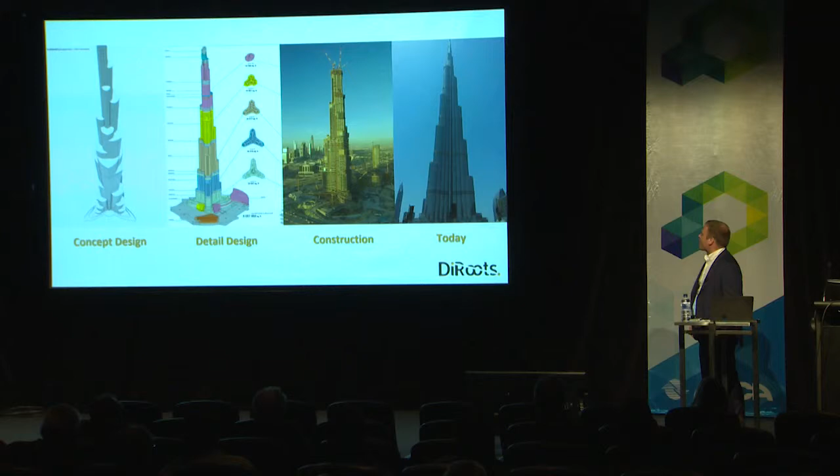And that starts with a story. Once upon a time, someone decided to inspire themselves in the desert flower to create one of the most impressive designs that we have today. You can see, I think you can recognize very well, this is Burj Khalifa in Dubai. And the reason I'm bringing this is because I want to make a comparison between what happened a few years back and what happened about 88 years ago.

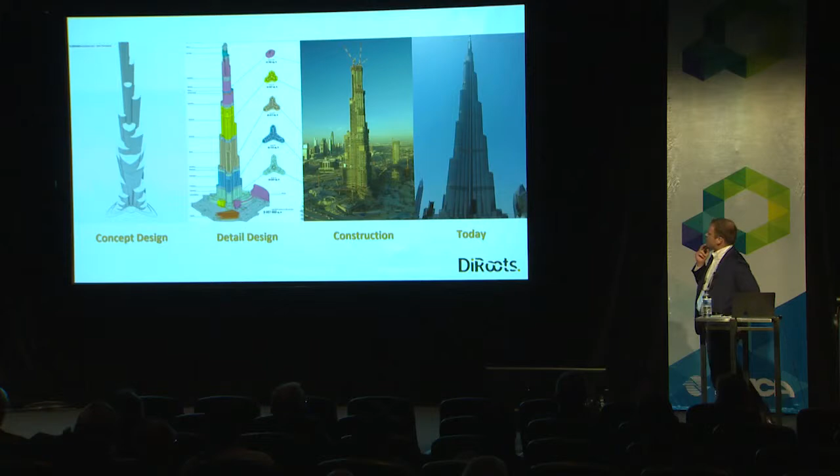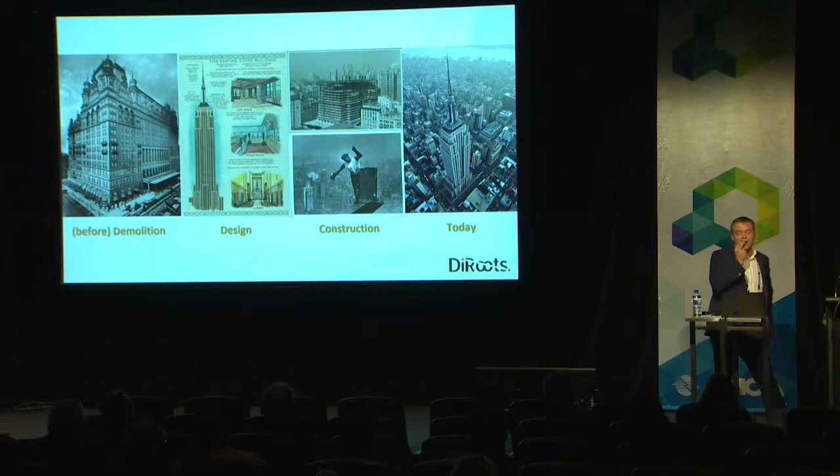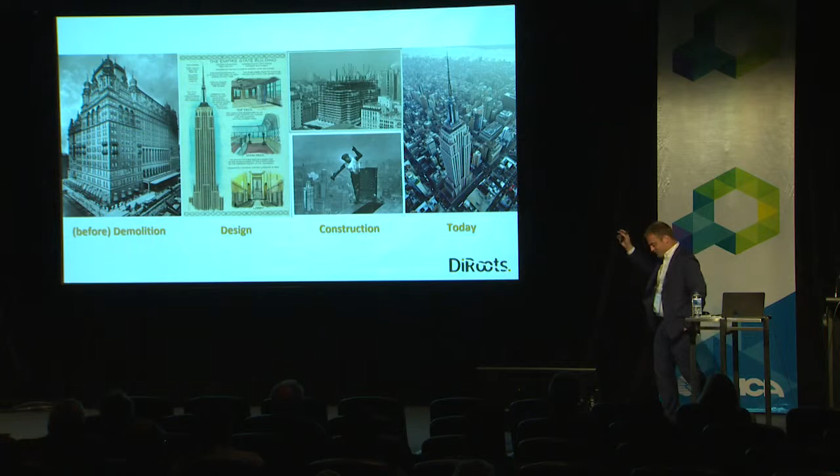88 years ago, someone decided also to make one of the greatest buildings of all time, in my opinion, the famous Empire State Building. I love this building. I love to see the pictures, we can see this guy standing in an incredible way. But the purpose is we want to understand what really happens.

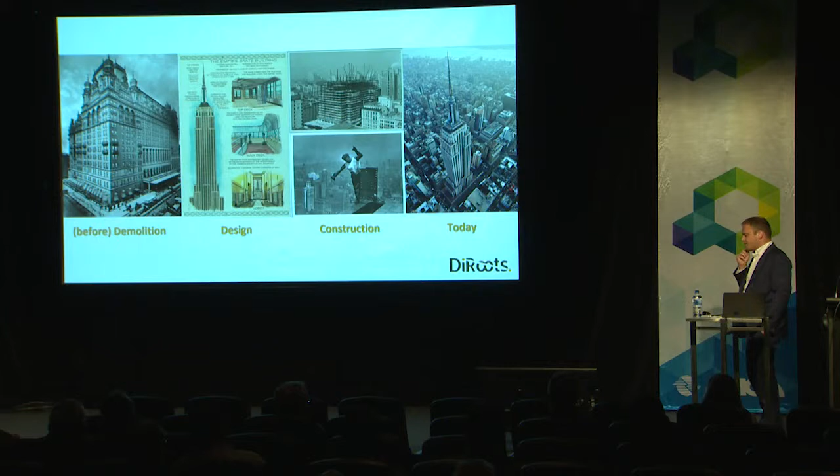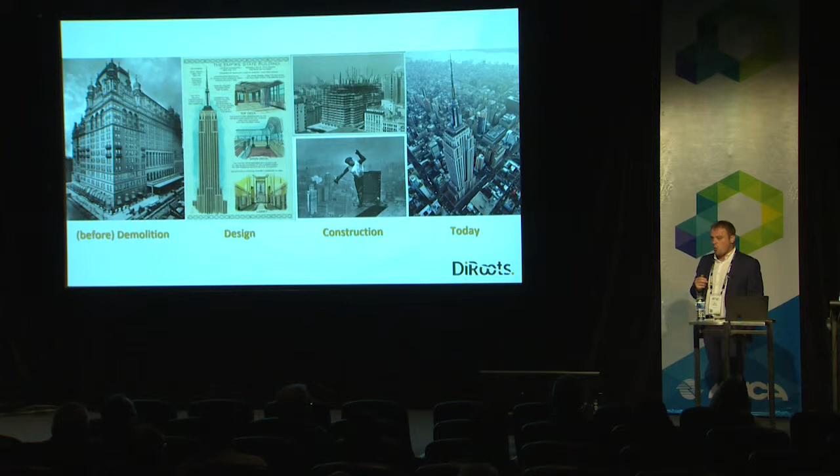There are quite a few facts which are very interesting regarding these projects, which both of them were built or constructed during two recessions. One of them was the Great Depression, which is a global financial crisis. And then we got Burj Khalifa as well, which was during the credit crunch.

Analyzing some project chronology, starting with Burj Khalifa, we can see the design started more or less in 2002. There were a lot of design alterations, I don't know if you know, even the names changed. But essentially, construction of this project started in 2004, and by January 2010 they completed it. So we got a program of 6 years just for construction. But that was 8 years ago.

Going now to the Empire State Building, and I love this. What happens is they start the design process in 1929, and they start the process of construction in 1930, with the excavations. Do you have an idea how long it took to build the Empire State Building? Any idea? To construct? I think you will be surprised. It only took 13 months. That is a fact, it's a fact.

And I learned that when I was doing my master's, because everyone used this case to demonstrate that there are real issues of productivity in construction.

Another curious fact about these two projects is one of them, Burj Khalifa, had a budget of $878 million, and they ended up spending approximately $1.5 billion. While in the Empire State Building, they had a budget of $50 million, and they ended up spending almost $41 million. And plus, they finished 45 days ahead of the project.

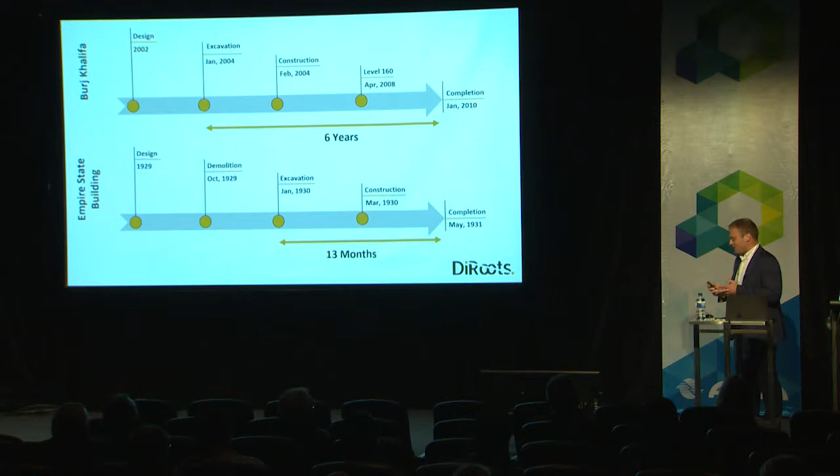So that is amazing. And so what happens is it seems we have a great problem in our construction. And we know, I think we all know about the construction issues we have. It's true as well, things are getting better, and technology is going to help, and that is the key. Innovation is the key. Technology is the key to really get the benefits we need and improve the speed and quality of our products as well.

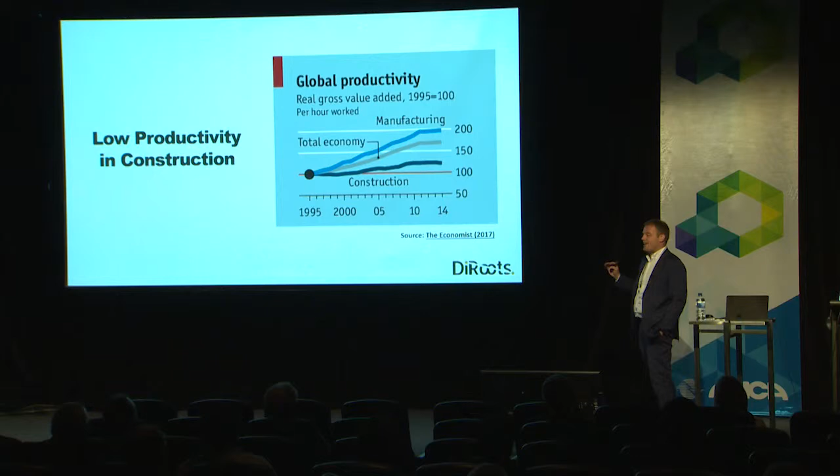As we know, we've got several issues with low productivity in construction. This is another chart comparing productivity in construction, and as you can see, it's coming down again in general as a global economy, while manufacturing is doing very well.

For example, some countries like Germany and Japan have stagnated and not really improved at all. But we also have some outperformance, and I was surprised doing my research to find out Australia is one of the countries doing quite well.

But we also have the biggest accelerator, which is China. I think we saw a video yesterday of what they're doing in China, how quickly they can build. I remember seeing a video of a 15-story hotel they built in 6 days. They claim, of course they work 24 hours a day, but that's the way they do it in China. They don't stop.

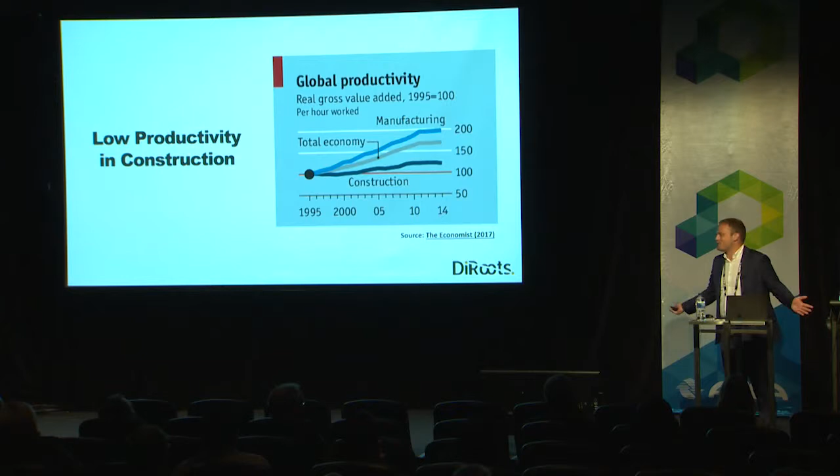Europe isn't doing even better - we're actually last in Europe in this case. So what really happened? We have all this technology, and we saw the example of the Empire State Building 80 years ago, which was an amazing job - they didn't have the technology we have, but they managed to do things.

So one of the things I want to do is go back in time and understand the first industrial revolution and the second industrial revolution and so on. As you know, and because you heard yesterday, sorry for repeating this, the first industrial revolution was powered by the steam engine. That was the main driver, the main enabler for the first industrial revolution.

So we talked about all these nice technologies that are coming up. But what does that mean for our industry, for the AEC industry? What we can see straight away is we're going to have supercomputers which will do everything, not like our old computers where we always get stuck, 'oh, it doesn't work like mine, today.' Also, what we're going to have as designers or engineers, whatever we are, we're going to have...

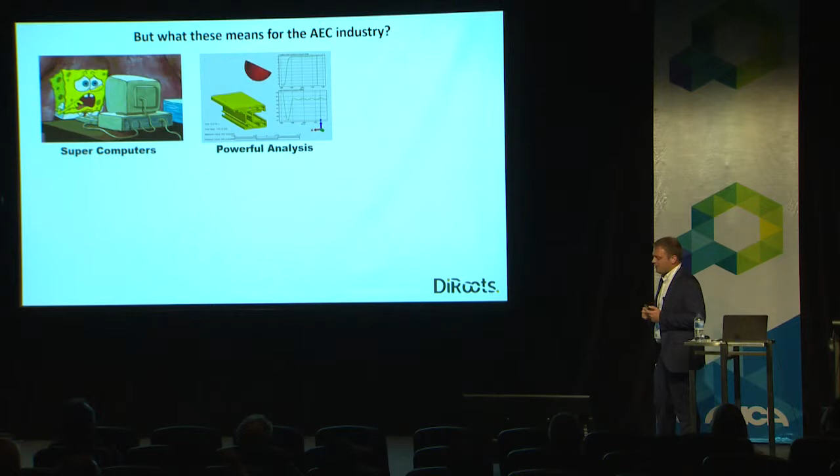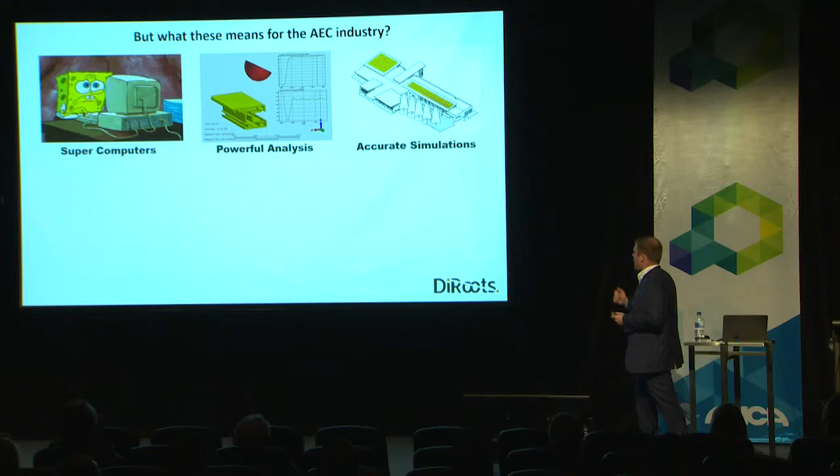Powerful tools to do quick analysis. We don't need to wait hours or even minutes. They will be done in seconds. Plus, we're going to have accurate simulations because of the way we're going to use the data, if we're using it the right way, of course. It will provide capability we haven't had before, and that is starting to happen.

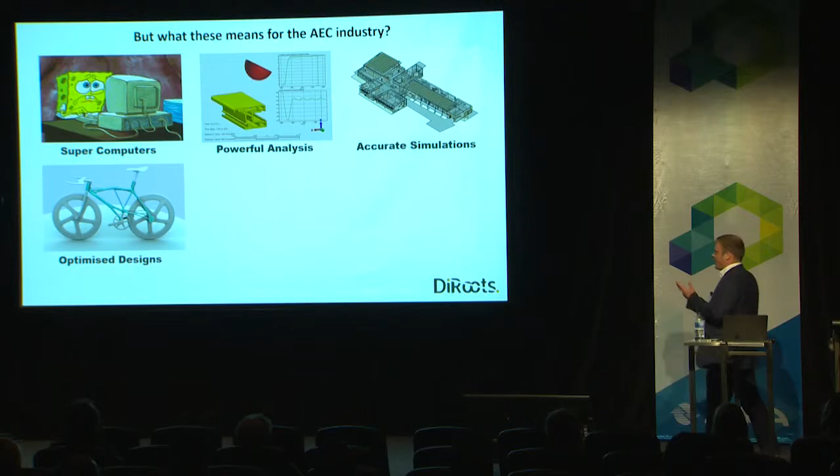More, we're going to have optimized designs. We're going to have the power to understand the variations of designs and their output, so we can analyze, we can simulate, and in the end, we're going to get faster and better designs.

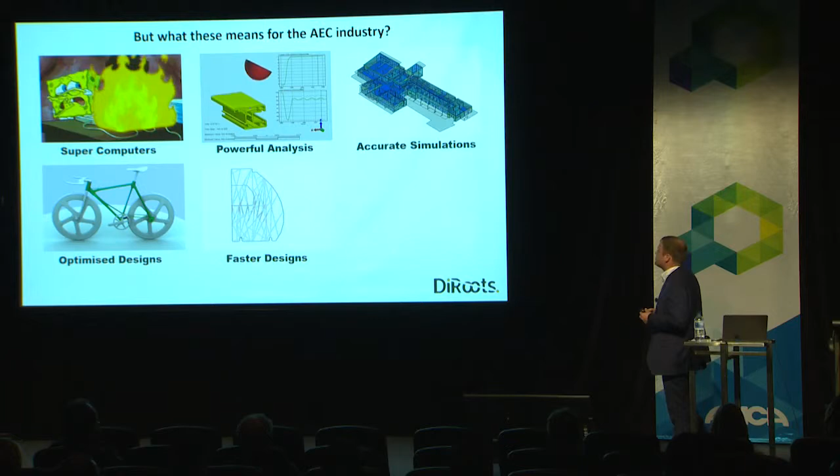We're going to have faster designs, guys. That's what is really happening to us. All this power is coming. The output is quicker, simpler, faster. Everything is going to be made quicker, in the quicker way.

And finally, what we're doing, and we saw some examples of this, and I have some examples regarding that, is the way we're going to be able to design. We're going to be able to design directly to fabrication. That's what is really happening already.

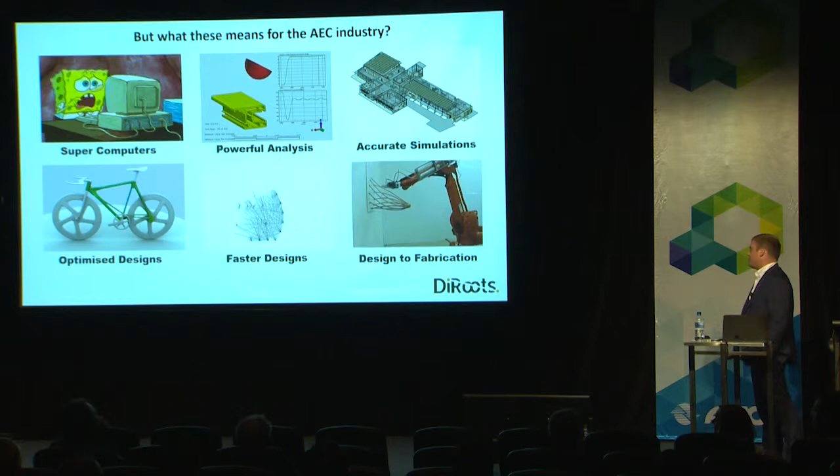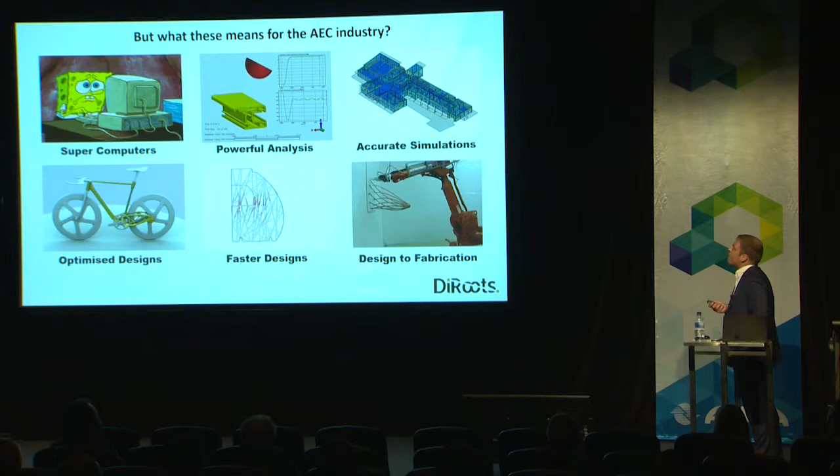And there are quite a few examples at the moment where people are doing design to fabrication directly. That's an example of what is going to happen to our industry, and it's already happening, to be frank with you. Moving on, I know we saw something yesterday about this: laying bricks. So is that a human job or a robot job?

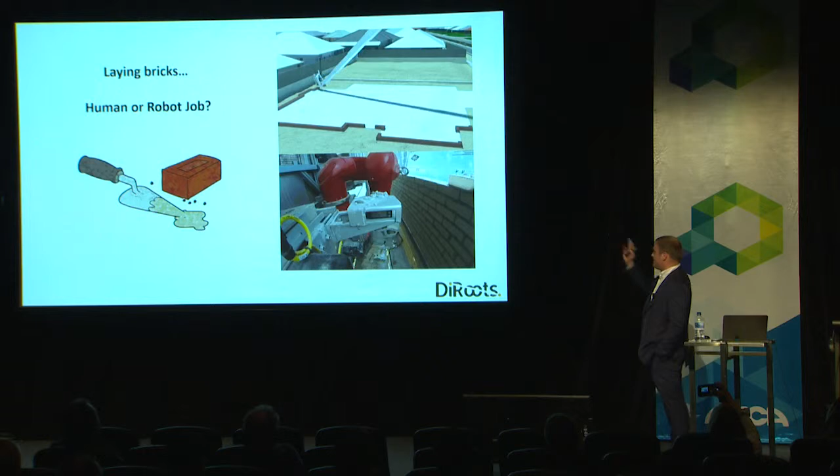In fact, there are already a lot of examples of this regarding laying bricks. The image on top is an American company, which claims that with this robot they can build residential houses and save around 7 to 8 weeks in terms of construction. We also got the example we saw below, which is a different type of machine that just puts the bricks in place.

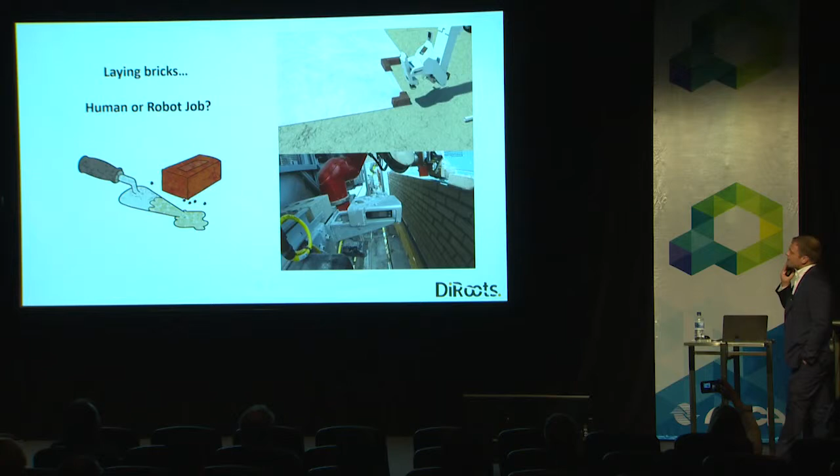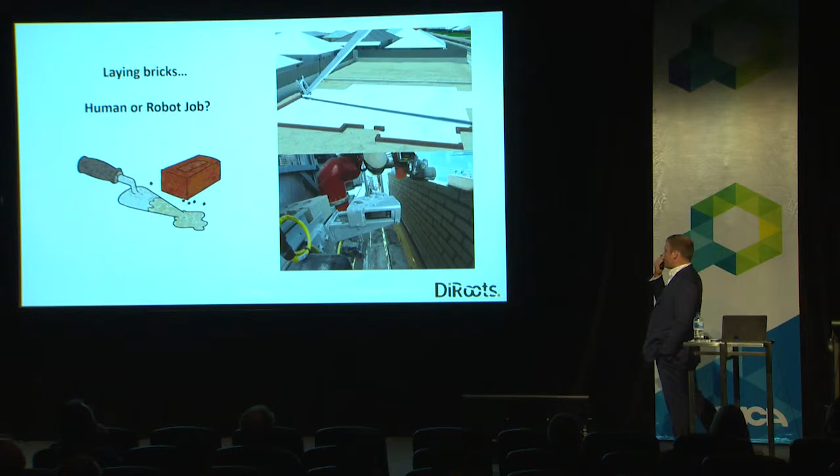So at the end, the robots are here and they're doing a good job. They're not going to be perfect for everything, we know that, but for repetitive tasks they will be very, very good because they have this kind of accuracy which even us sometimes we don't have. They have all these lasers, all these sensors, all these tools that humans don't have.

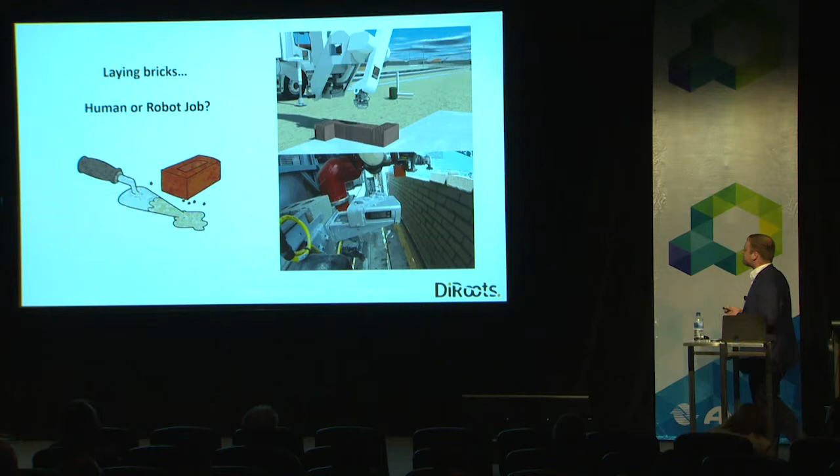Dubai is looking forward to, by 2030, having 1/3 of these buildings be all 3D printed. But they also claim to be the first - apparently I found out they were not the first.

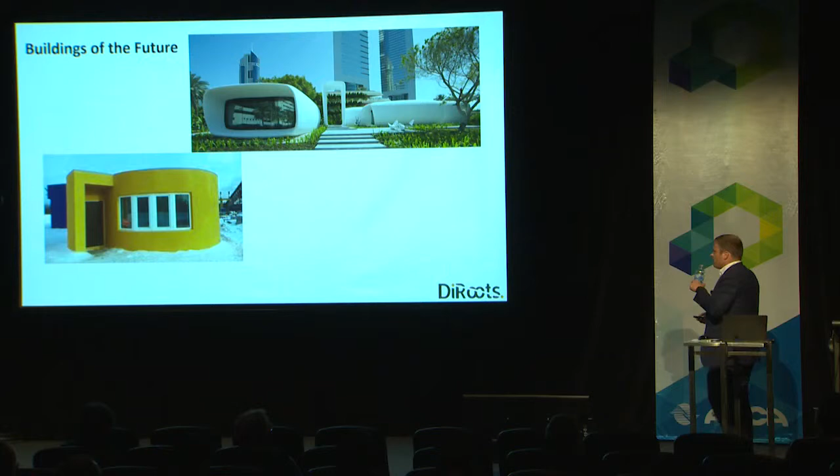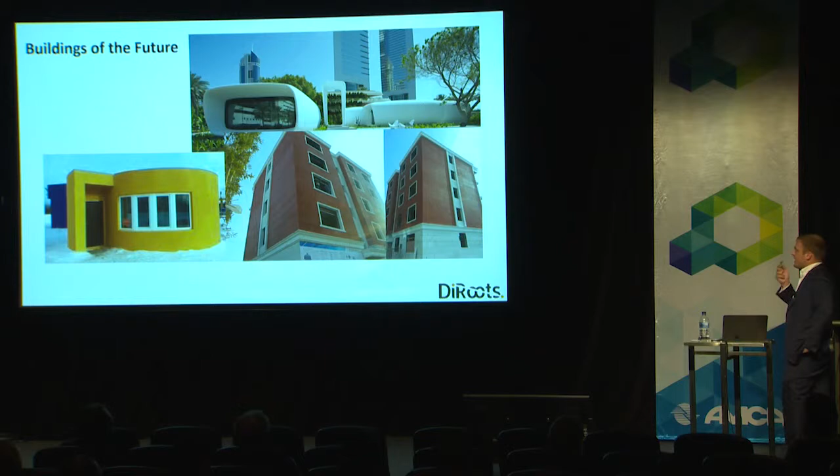What happens in China, the biggest accelerator, is they are already building 5-floor buildings with 3D printing. There are some very interesting facts regarding these. They built this 5-floor residential building and came up with some interesting data.

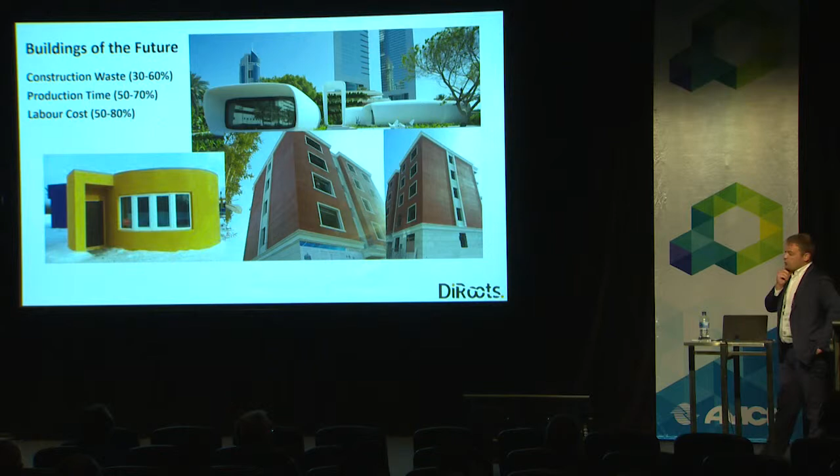They claim that construction waste can be reduced between 30 to 60%. They also claim that production time can be reduced by 50 to 70%, and labor costs by 50 to 80%. But the most interesting one is regarding the total cost - it cost them $161,000 to build this. So that is the difference, the cost.

Everyone is looking for cost reductions, and I don't think it will be possible to build anything like this for $160,000 - I think it's almost impossible. But they managed it, and they want to make it bigger. They now plan to do something even bigger - that was just 5 floors.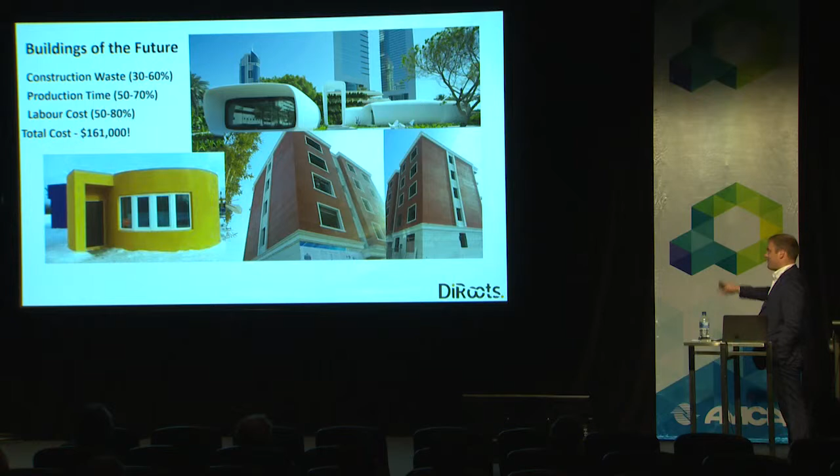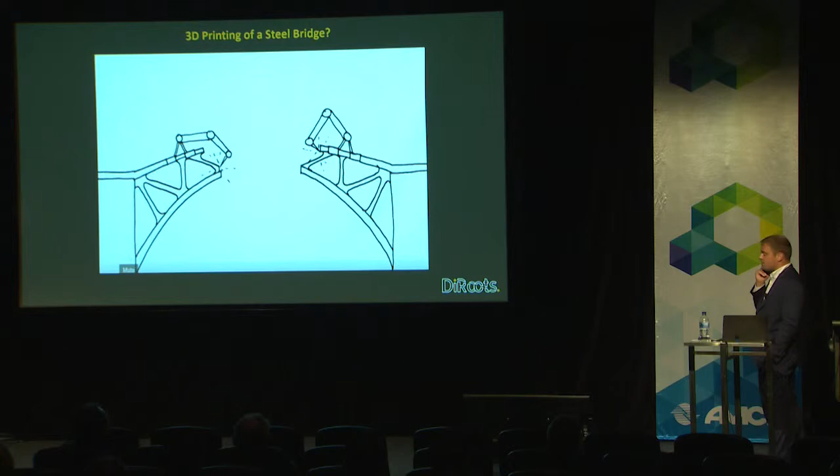But there are also some quite good examples, not just buildings. We have a company in the Netherlands which is now creating the first 3D printed steel bridge. They are completing this bridge next month, and expecting to install it in its final location in Amsterdam next year. That was the first 3D printed bridge in steel. It's not just about houses, it's many other things as well - even bridges, things you'd probably never think could be done with 3D printing.

There is also another great example. Play, please. Can you play? Oh okay, I can do it myself.

There is a Chinese company that also developed this monster, called the segmental bridge launching machine, which can build quite a few kilometers of bridge with these kinds of precast segments which they can install. Have a look and try to understand.

I think it will be quite amazing in terms of engineering and precision they can do this. That is just a good example of what can be done. They are doing all this magic - or if you don't want to call it magic, these strong and amazing robots or machines we're creating nowadays.

But let's imagine a little bit about the future. I don't know if you saw, there is a very nice video about generative design from Autodesk. This for me is a great inspiration. If you have the opportunity, do a Google search or go to YouTube and type 'generative design Autodesk', you will find this. I just took some print screens from this video. What they're trying to demonstrate is something quite interesting, because I think it's going to be possible, and it's coming up very, very soon in terms of technology.

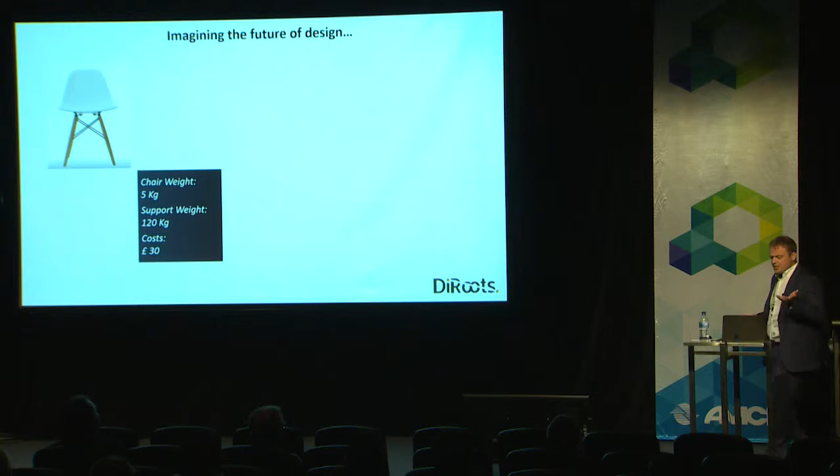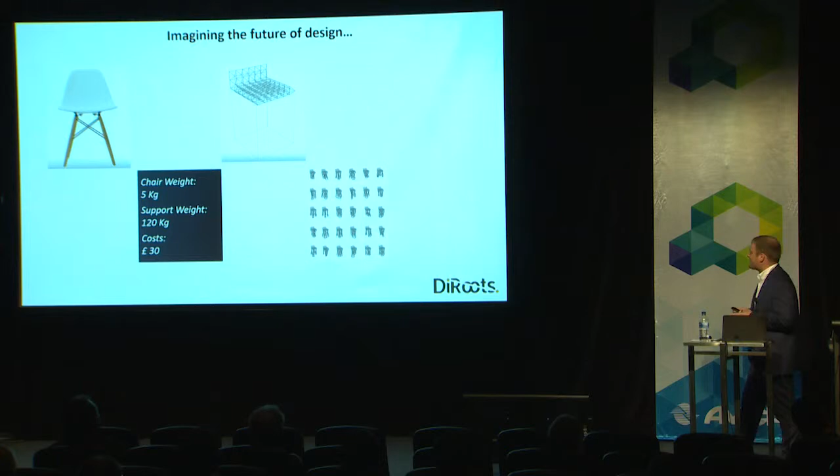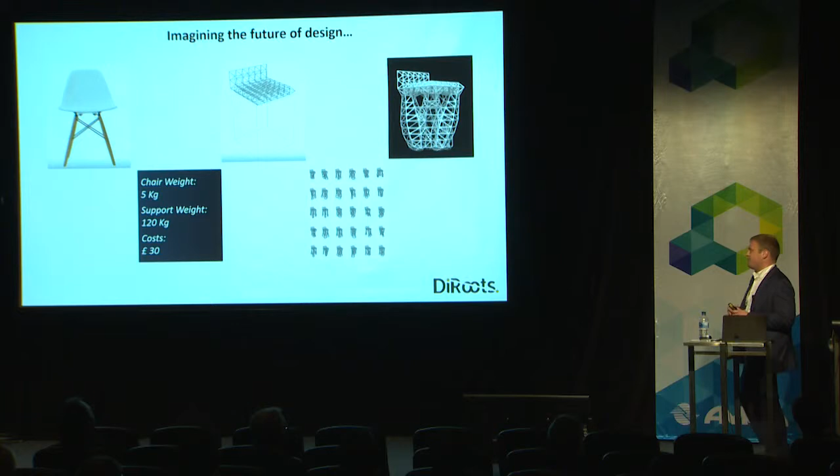But the reason I'm trying to use this as an example is because I would like to create a specific example for our industry. So imagine now that we have an architectural model, a conceptual architectural model. I don't want to go too far - so let's say we are a structural engineer.

Imagine now we've got software A, B, C. You take this 3D model from a concept design and bring it into this software. As a structural engineer, you provide some basic inputs of what you want to achieve. So imagine now the machine or the software will start to calculate all the design options of the structural steel model, as an example, and it will do it. Believe me, this is happening, and it's coming up soon probably with some people - that's the kind of tools we can expect.

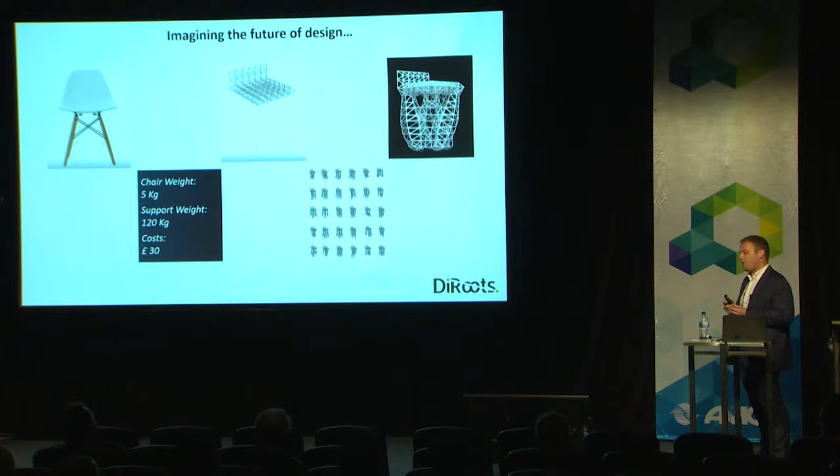And watching this video, one of the things I perceive for the future is probably anyone can be a designer, because all the power, all the knowledge will be in the machine. They will know more than us because all the information is set, is there, is on a database, and they can do anything. That's one of the examples I really like to think about, and sometimes I use it to try to provide an idea of what is coming up.

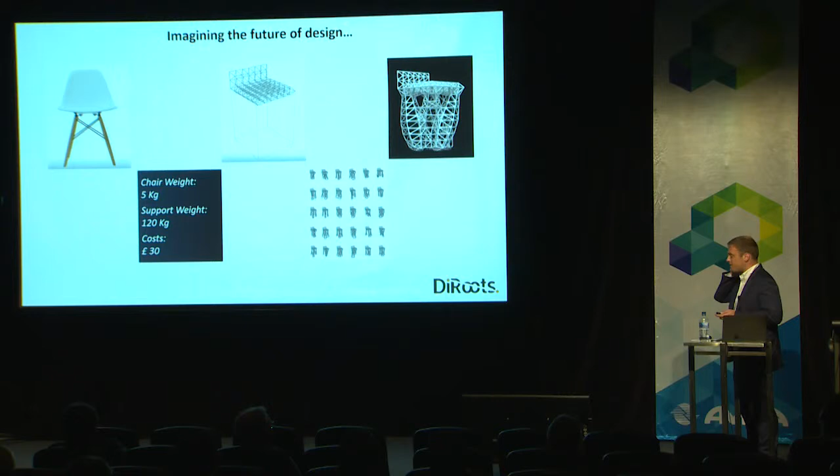So now also talking a bit about what we're doing at DiRoots - we are a very small company, to be frank, and we only started almost 10 months ago. What we're doing at the moment, we have a client, and honestly I can't provide the name of the client, but I think you can see what type of client we're talking about. They still have some traditional ways to work.

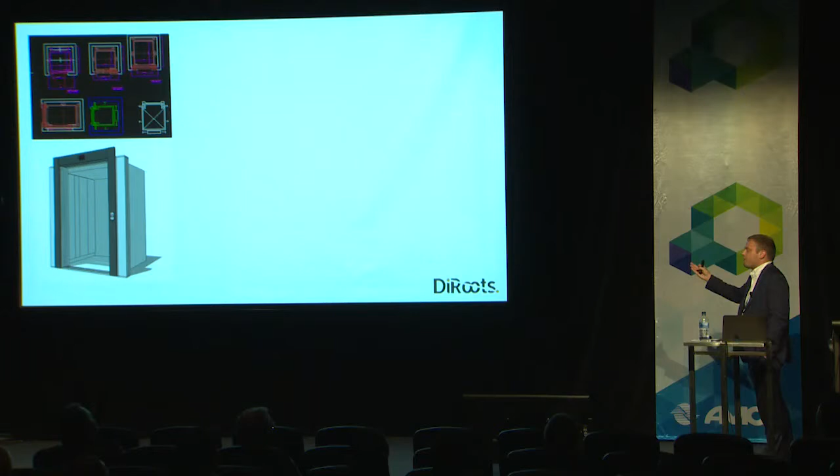What they normally do, like most people at this stage do, is some sketching in 2D AutoCAD, and then after they get some approvals, they start doing the 3D modeling. So they also want to go through a digital path, and that's why they invited us to speak with them. After we understand what they're looking for, we define this automation plan - you could call it a design automation plan.

It's not very hard, because one of the things I understand is that anything that is rule-based - which technically any engineering is - can be code. That's the challenge. So for the first phase with this client, we're trying to work based on the specifications they have for their products, because they're very well organized, and it's not that hard, to be frank, from my perspective of what I could understand.

Our first plan is to allow the designer to specify the product, and automatically this software - or platform, which will be a combined platform, a web-based platform plus a Revit plugin - will automatically create the digital model. In this case, it will be a lift, as you can see - so a digital object, or BIM object if you want.

What we want to do as well, and that is possible, is allow them to do drawing production - automate the drawing production. It's quite simple to do with lifts because there isn't a lot of confusion - you just say, oh, there's the space for the lift. So that's what we want to do.

We also want to do some design validation. What we mean by design validation is a term I like to use for clash detection. I'm from an MEP background, so I hate the word clash detection because in MEP you always have clashes. So I like to call it design validation.

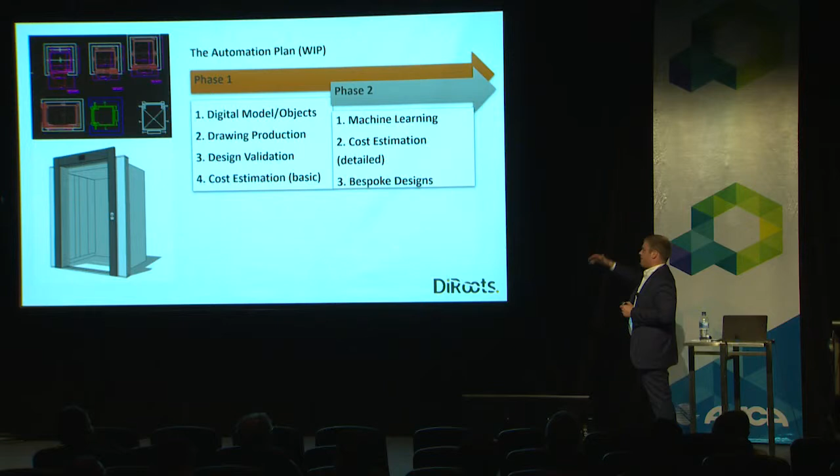On phase 2, we're looking to introduce machine learning, and I think you probably understand why. The reason we're doing machine learning is because we want to capture from the first phase all the experience we're having, all the signals we're receiving in the database, and the actions as well. So from that, the next step is to be able to design some kind of bespoke designs for lifts, because they do a lot of bespoke designs for lifting—it's not just the standard model. So we're learning from the first phase, and we can also start to look into the bespoke designs, which normally are more specific and of course more expensive.

And also, as a final step, because we're creating the database and data sets, we're also planning to do a detailed cost estimation. To be frank, I can't say it will be 100% accurate, but we're looking forward to doing something quite good. So that's the project we will probably begin next year.

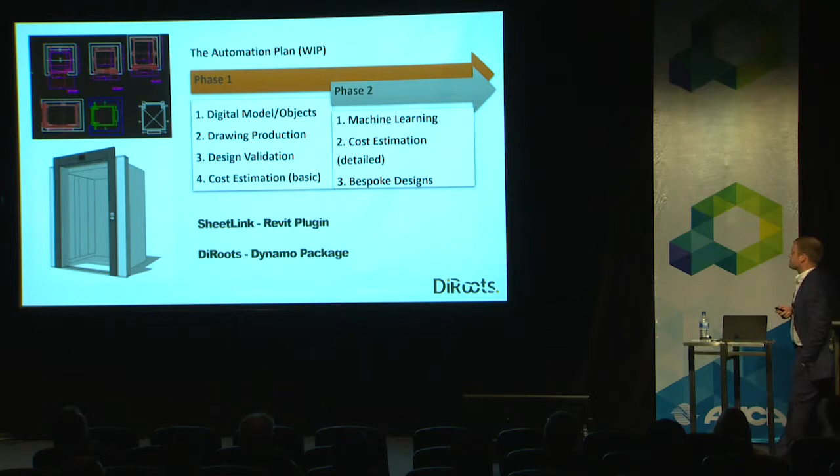And we also have our own products. I don't know if you heard, we launched a couple of months ago the SheetLink. It's a Revit plugin—it's free, so anyone can download it, anyone can use it.

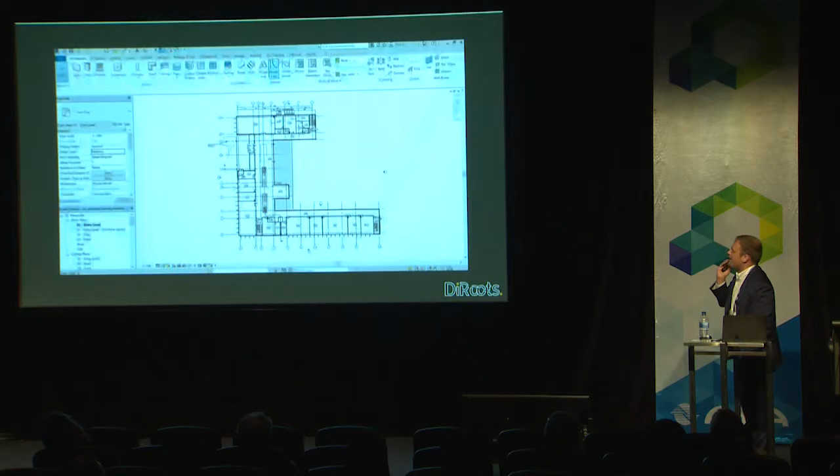I also have on the next slide just so—the quality is quite bad, sorry.

This is our SheetLink. Like I said, it's free, and what you can do is a very simple thing but very important—it's about data. That was our first plugin, our first public plugin we did. Why did we want to do it? Because data is one of the most important pieces of the puzzle.

With this plugin, we're also releasing, probably in a couple of weeks, maybe 3 weeks, a new version with a few more options based on some clients' feedback. We're happy to provide this because it's something we're giving for free, and we're also learning from this experience. Hopefully soon we're also launching at least a couple more plugins, and again they're all free. That's the big purpose of DiRoots—we want to create free tools, but also affordable tools. That's the way we believe.

I don't know if you noticed, for those who really like Dynamo, we also have a Dynamo package, also called DiRoots. So if you want to explore, feel free.

I also would like to give you some ideas about what we should be doing as a business. A lot of things are changing in the industry, and I think it's important to be able to attract new talent. One of the things that surprised me, because nobody mentioned it yesterday, is that one of the skills I think is very important for the future is coding.

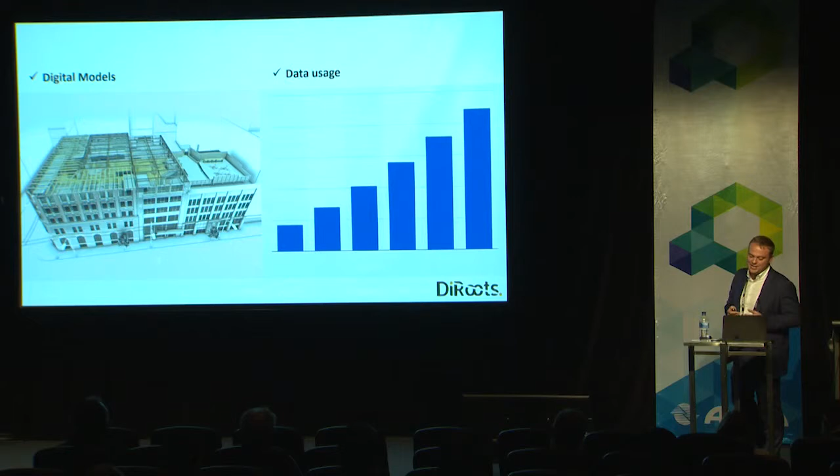I think it's important as well to find which kind of technology adoption can bring higher revenue, and also to identify the new products and solutions coming up. I think this could be one job for a person - finding what kind of new products, because every week we get new products, every week we get new solutions, but most of them aren't good - we need to try.

One of the things I think is very important nowadays is to find new partners. Sometimes we need to find the right people to work with us, to help us leverage our capabilities, and that's the tricky part as well.

Now moving to the last section of the presentation - why we should care about all of this. I think we could see some patterns of what is happening in society, and what has happened in society. We could see a lot of things in terms of societal change.

So with these new technologies, what do you think is going to happen? I'm sure a lot of things will be different. I have a video here with sound, please - these are experts talking about what could happen.